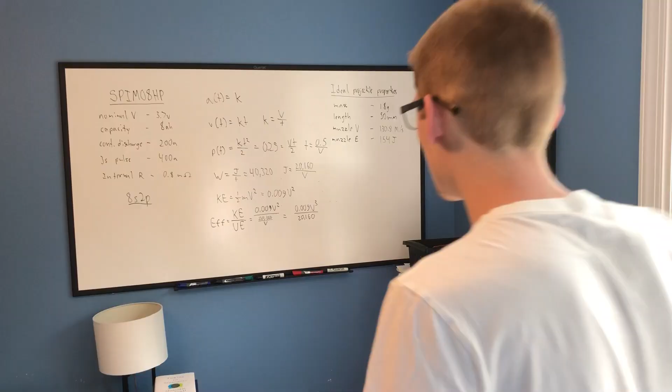I started out this week doing a lot of math to try and model the path of the projectile. I quickly realized though that I was being too optimistic with my calculations, that I would never really get to that point, or at least I wasn't willing to spend the money to be able to get to that point.

You may remember that a couple videos back, I explained my belief that capacitors were inherently inefficient in a coil gun system and could not allow for high efficiencies, and thus a direct drive system was the only way to achieve higher efficiencies. What I mean by that is that the coils would be directly connected to the battery. The battery would be directly powering them, and you don't have a secondary buffer like a capacitor bank that would be powering them indirectly. And in doing my calculations, I realized that the battery itself would be the primary bottleneck in a system like this.

In order to achieve muzzle energies of around 1,000 joules, which is a very respectable gun muzzle energy, with a reasonably short barrel length, you would have to have a battery that can output 3 to 6 millisecond pulses of around half a megawatt, 500,000 watts, which is a lot. I don't have the money for a half a megawatt battery, so instead of trying to get to that point, I went off of what I could get for a reasonable price, and again, as I stated in the previous video, went for efficiency and not power.

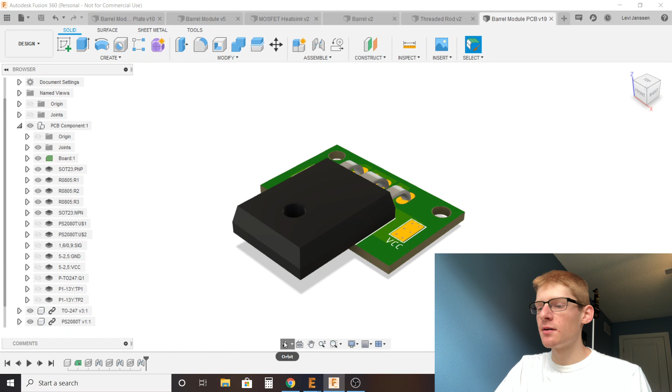Every barrel module has its own circuit board, and the primary component on that circuit board is this really big MOSFET. This MOSFET is the TO-247 package. The main reason I wanted to use that one is, well, of course it can do a lot of current, but more importantly, the leads are spaced out so I can get proper wire connections, proper traces in there.

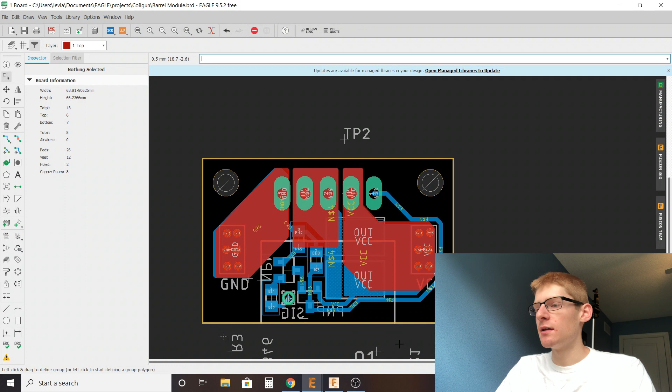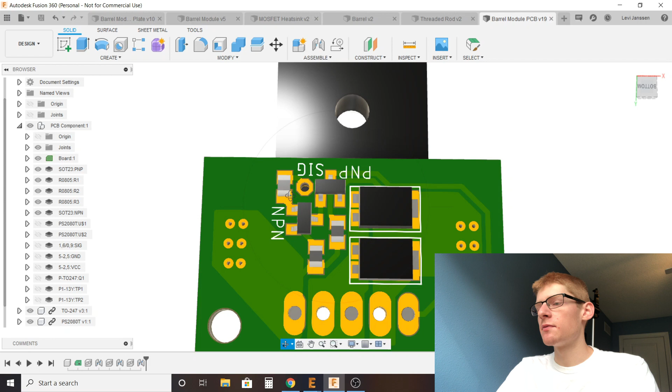And this circuit board was designed in Eagle. Eagle has a very handy feature where it automatically links to Fusion 360, so I'll just be showing it to you in Fusion. So of course this is the MOSFET on top, and then if I turn it over, you'll see some SMD components. Over here, there's a PNP, NPN transistor in the SOT23 package, and then a couple of 0805 10 kilo ohm resistors. These 5 components are what drive the MOSFET.

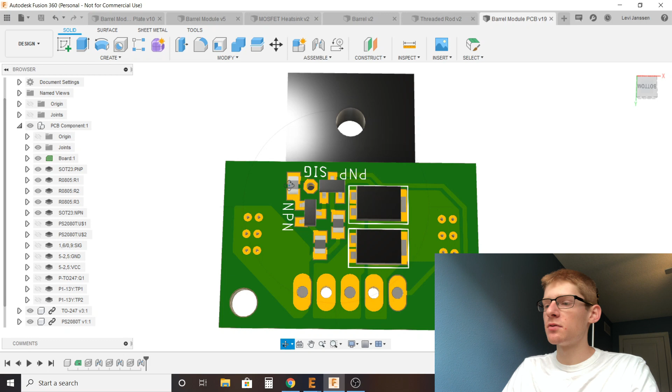They essentially take a very small current at a small voltage from your microcontroller, say an Arduino or something like that. At this hole right here, this is where a signal pin would be, but they take that small current at small voltage and then increase it to the full voltage at a higher current to fully turn on the MOSFET. So effectively what they're doing is they're giving the MOSFET logic level control.

So every circuit board, every barrel module has that logic level control built into it. So all I have to do is wire it up directly to my microcontroller and say turn on, and it'll turn on. Then over here, these big wide flat SMD components here, these are diodes. These 2 diodes are in parallel and they're running in the opposite direction of the current across the coil. So they are flyback diodes.

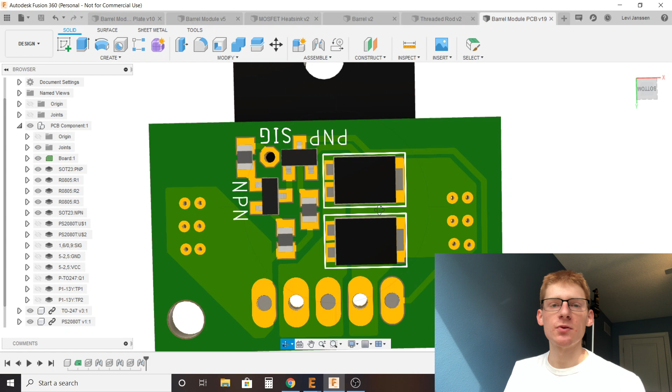So when the coil turns on, it pulls a projectile through, but then when it turns off, the opposite current is generated in the coil, which could potentially be damaging to the MOSFET or the battery or other components. So these flyback diodes allow that current to dissipate by being in the opposite direction. And each of these is rated for 250 amps over an 8.3 millisecond period.

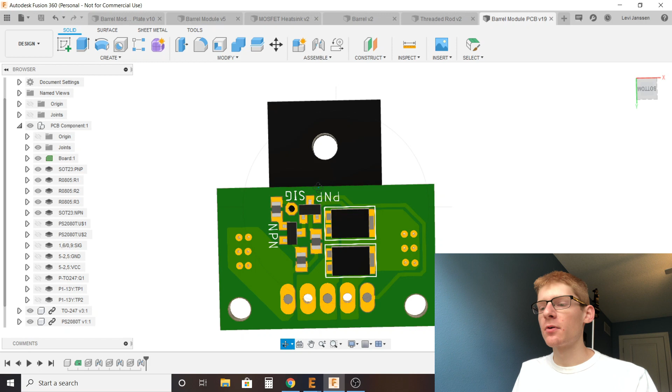Oh, I should also mention that each of the modules needs to be able to handle and conduct 300 amps. The idea is that there will be 4 of these modules on at the same time, so 1200 amps total. That's the maximum the battery should be able to output. So then each of the 4 only needs to be able to handle 300 amps, which is much more reasonable. Still a lot, but more reasonable.

I typically get my electronics from LCSC.com, which is a sister company to JLC PCB. And since they are a Chinese distributor, they do have a lot of Asian brands. So these 2 bigger components, the big MOSFET and the flyback diodes, they are both Chinese manufacturers, which makes me a little bit uncomfortable

just because I've had experiences in the past where the components were not rated for what they claim to be rated for, but LCSC is a reputable distributor, as far as I know at least, and they both have comprehensive data sheets that are in English that have everything that I would need. So they seem legit. I'm just going to assume that they're legit. I think anything that comes from LCSC is probably tested and ensured of quality.

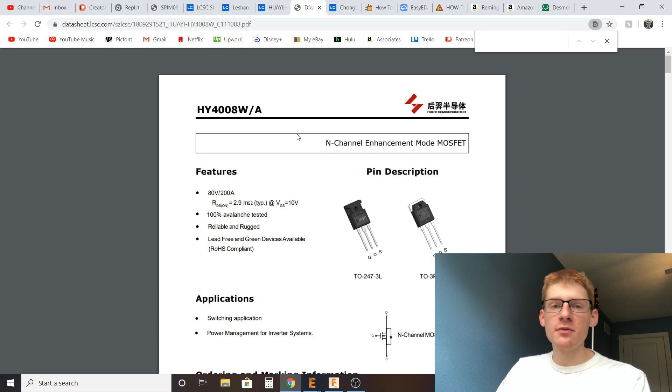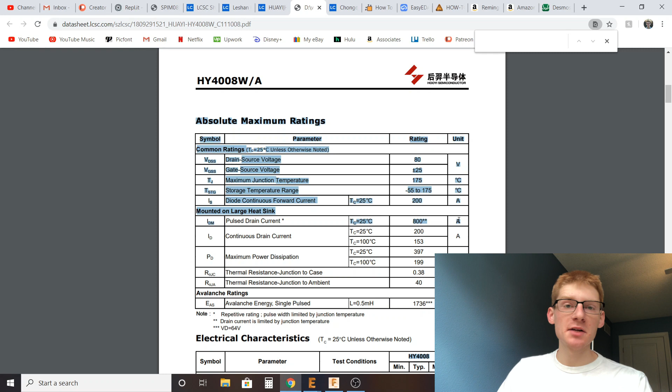And these components are rated for a lot more than I'm going to be pumping through them. These MOSFETs are rated for a pulse current of up to 800 amps. And again, I'm only doing 300 amps per module. So there's a lot of room to expand there. And then these guys are again rated for 250 amps, but I have 2 of them in parallel, so it's more like 500 amps.

And all of these components are also rated for up to 80 volts. And I'm only running 33.6, so I could double the battery voltage, thus quadrupling the wattage, and everything would still be able to handle it. On the component side, I'm definitely going a little bit safe.

If the MOSFET fails, MOSFETs typically fail on, which would mean that it would just be continually discharging the full current of the battery through it, which would probably blow up the battery, which is not something that I want to do. Back to the circuit board here.

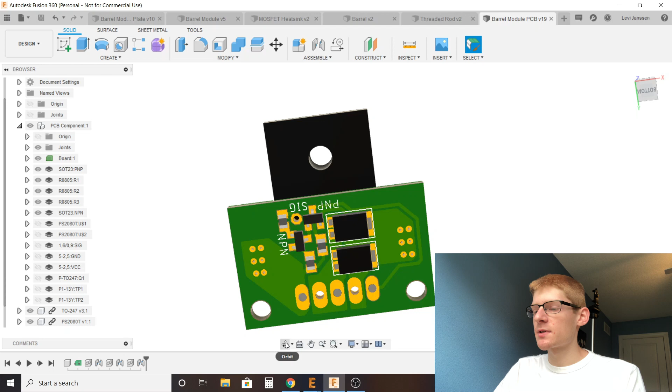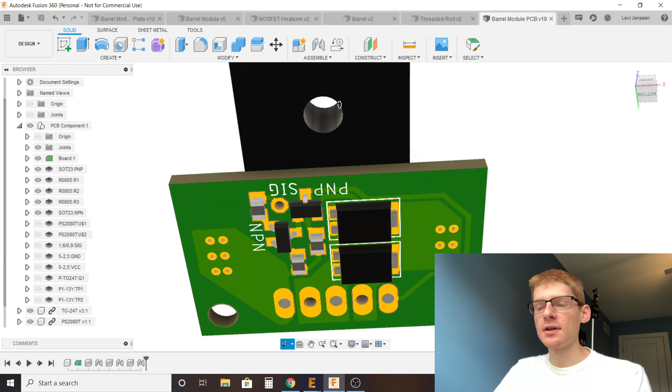So you've got your components on the bottom side and then the big MOSFET on top, and then you have some really big traces here, or at least as big of traces as I could make it. I made it so that the traces are on the top and bottom layers. So I'm effectively doubling the trace width by having it on top and bottom. The traces are still not as thick as I would like them to be, but I'm not too worried about it. The bottleneck, as far as current goes, is not in the PCB, I don't think.

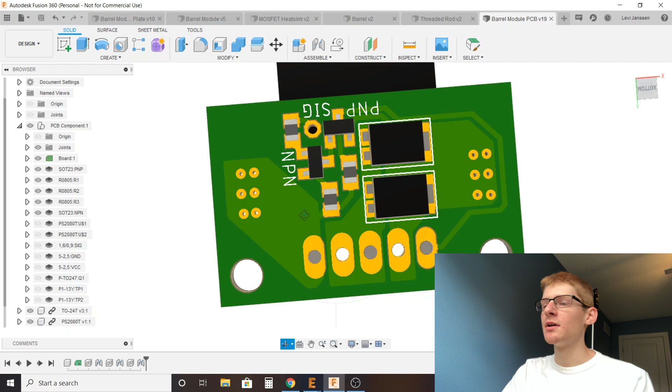I'll show you where I do think it is in a second. The other reason I'm comfortable with these PCB traces is that they're super flat. Pretty much the entirety of it is exposed to air, which means that it can dissipate that heat off quite a bit, and they're really just big heat sinks. And there's also going to be quite a bit of aluminum around here to soak up that thermal energy, so I don't think it's going to be too big of an issue.

I definitely don't think the circuit boards are going to explode. Other things are going to explode before that happens. So this is the circuit board. This is the first thing that I started designing, and that brings us to the actual barrel module design. This is the barrel module, or at least how it's looking so far. So right here is the PCB, as you saw, and then the whole thing is up against this plate.

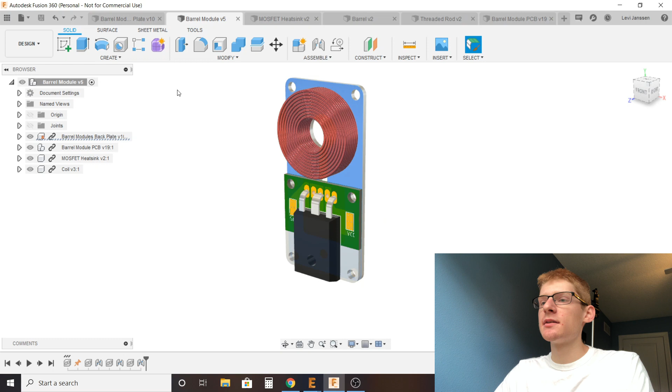This is the backing plate. This is what everything sits up against, and it's also what will be squishing all of the barrel modules together. This is a 1.6 millimeter aluminum plate, and it's kind of the foundation for the entire module. So this backing plate has two holes here and here that line up with the holes on the circuit board. So this is where the circuit board mounts. It'll just screw down to here.

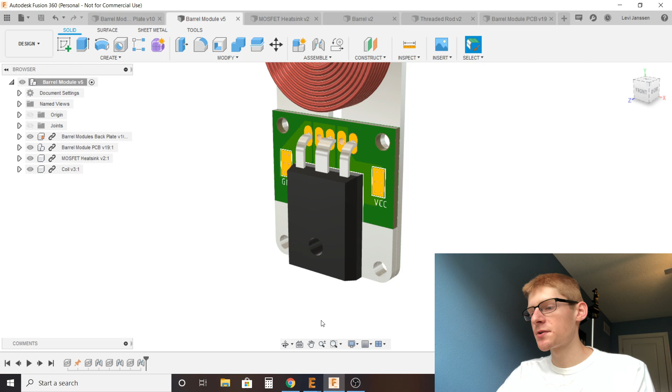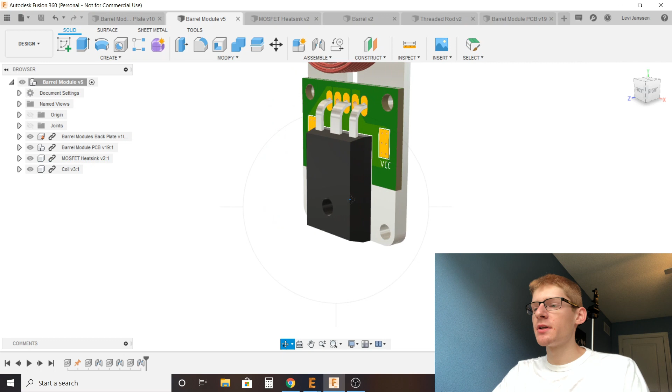Then you also notice that down here, the aluminum is a little bit thicker. I designed a little aluminum plate that will attach down here, and this is where the majority of the surface area of the MOSFET will be pressing up against. And then this plate also has holes in it for the mounting screws of the MOSFET to go through. So this is the primary heatsink. It's a good chunk. It's 3.2 millimeters thick of aluminum that should be a decent heatsink.

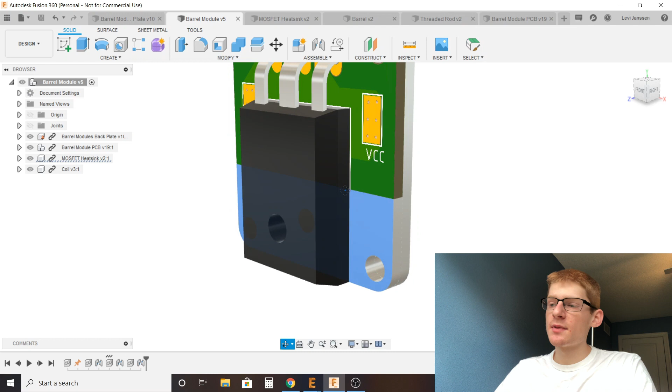Then this other plate is also 1.6 millimeters. The reason I made it 1.6 millimeters specifically is because that's how thick the circuit board is. The MOSFET is partially on top of the circuit board, and then this way everything will line up nicely. Everything will be flush with the 1.6 millimeter aluminum plate.

Then of course up here is the coil. There's nothing really attaching it. Not really gonna worry about that. Once you get multiple barrel modules, the coil should be squished into place, and it should be a pretty tight fit around the 10 millimeter carbon fiber tube that I'm gonna have as the actual barrel.

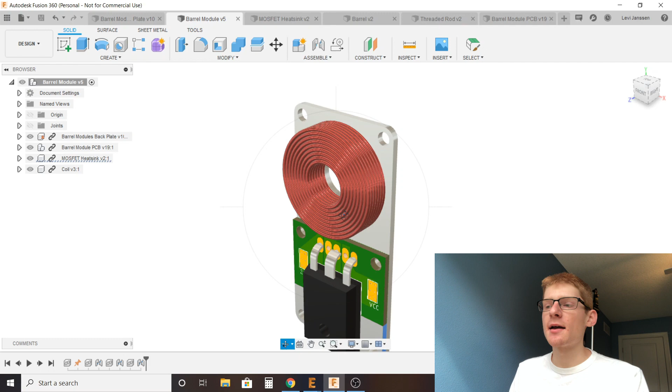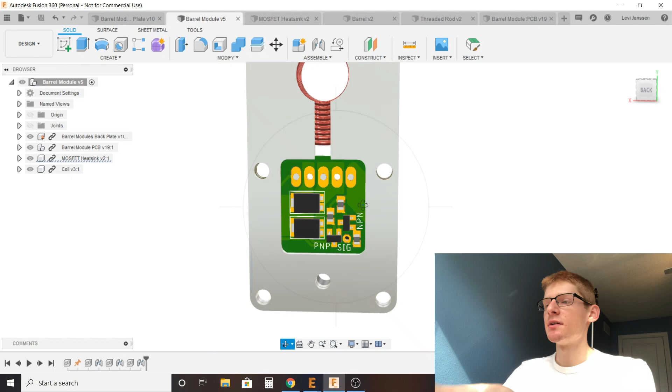Oh yeah, and I didn't show you the back of this. The back of this looks really cool. All of the SMD components here have a little cutout in the aluminum plate. That's where they go. So I was kind of constrained for space here because I knew they needed to fit in this little cutout. So all of your components are back here, and they're distanced from the aluminum so they don't short to it. But yeah, it all fits in there really nicely, and I'm very happy with how it looks.

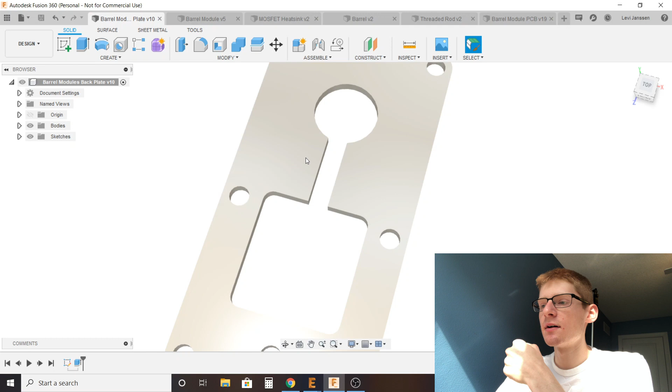You might have also noticed that the backing plate has this slit in here from the electronics hole to the barrel hole. That is for the leads, the wires of the coil. Once you have a bunch of these that are squished together, you won't have room to take the leads of the wires and just move them anywhere to stick them into the circuit board.

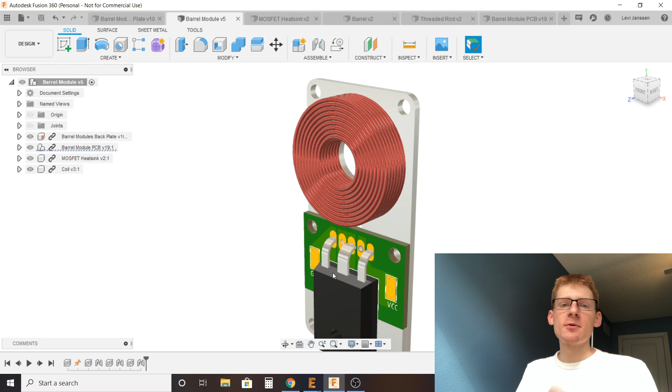By the way, these holes here, that one and that one, are where the leads of the coil go. But you can't just stick them anywhere willy-nilly because there won't be room for it, because everything's going to be really tight in here. So you'll have one lead that'll be coming out of here and then one out of the bottom here, because that's just where you start and stop winding the coil. So then they can both go down through this slit without taking up any room because they will be flush with the aluminum plate.

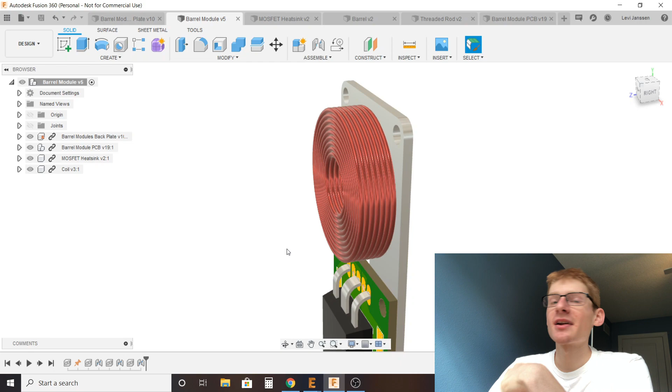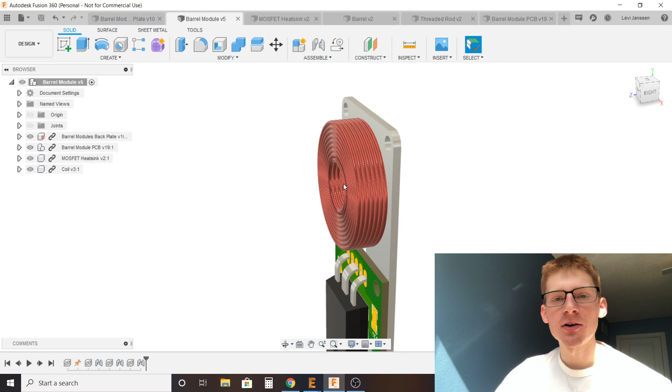But yeah, so that 96 milliohms is in order to get 300 amps per coil. And then I brought up the current bottleneck earlier. I think that's the coil, because these wires are 0.94 millimeters in diameter, and they're all bunched together. I think if anything is going to fail, it's going to be the enamel copper wire in the coil.

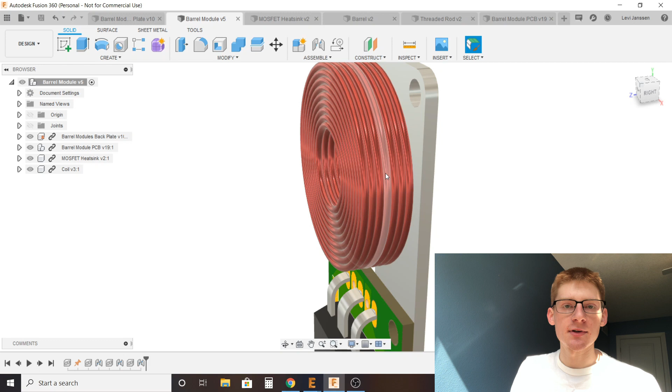And of all places for it to fail, I think it's a good place, because if the electronic components fail, they're probably going to fail on, and then we'll have an inrush current that'll just kill everything. But if this fails, it'll effectively be like a fuse. It'll break and then you'll have no more connection and then nothing will happen. So I think this is a good place to fail. I am okay with the coil breaking, but I would not be very encouraged if the MOSFET failed.

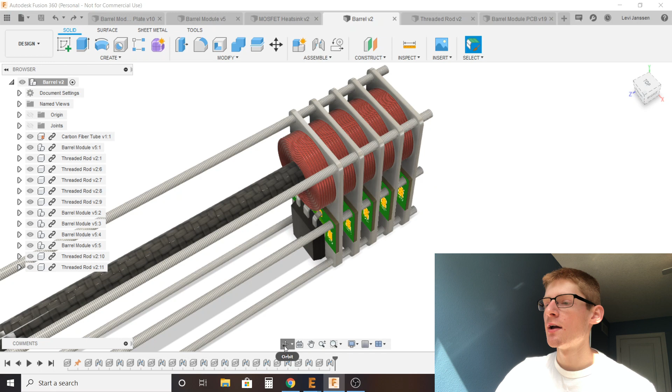So this is the barrel module. Now let's talk a little bit about how the barrel modules are actually all going to come together to make the actual barrel. So this is my design for the barrel so far. I have the 10 millimeter diameter carbon fiber tube at the center. By the way, that's 8 millimeters internal diameter. I intend for the projectile to be 7.5 millimeters in diameter and around 50 millimeters long, just a soft steel.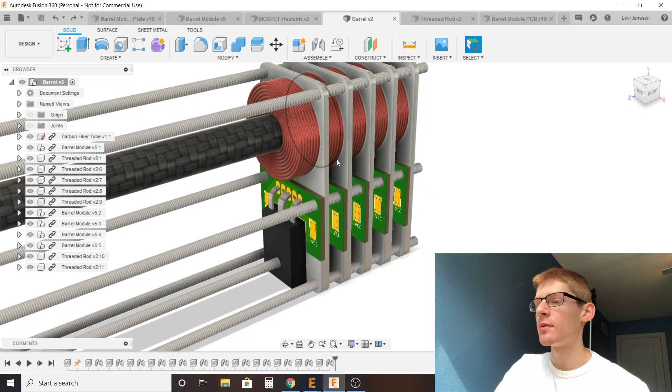But the backing plates for all these barrel modules have a lot of holes in them, and you want to stack them all butt to butt, face to face. So my thought for this is that you'll just have a bunch of threaded rod that you'll run some lock nuts down, and then use that to clamp everything together. I think it should work pretty well. I could make it stronger if it's not, but I think it'll at least work for preliminary tests.

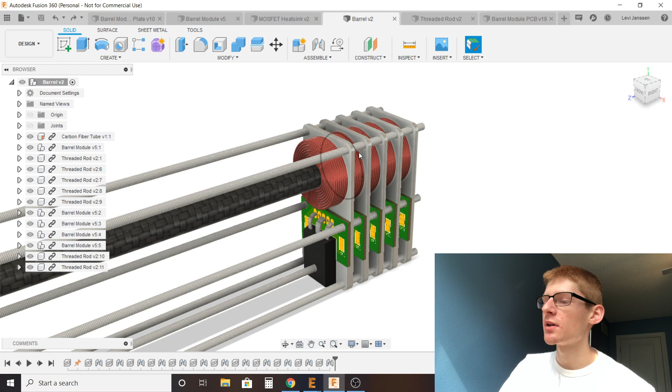So I currently have 7 threaded rods going through here, which is kind of overkill, but it's what I could do. It's kind of just the only thing I was able to do, because I needed some up here to clamp on the coil. I needed at least two to hold the circuit board in place. I needed one to go through all of the MOSFETs. Then I needed two in the corners to hold the bus bars.

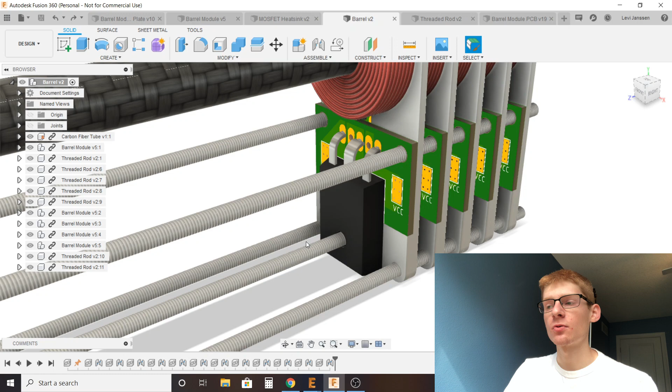I haven't modeled the bus bars yet, but what I'm thinking right now is that the bus bars will hang below it, and that they will be held in place by 3D printed brackets that will hang from these two threaded rods here. And then sticking on the topic of the bus bars, the power distribution, I didn't bring up these pads on the front of the circuit boards. That's the power distribution solution.

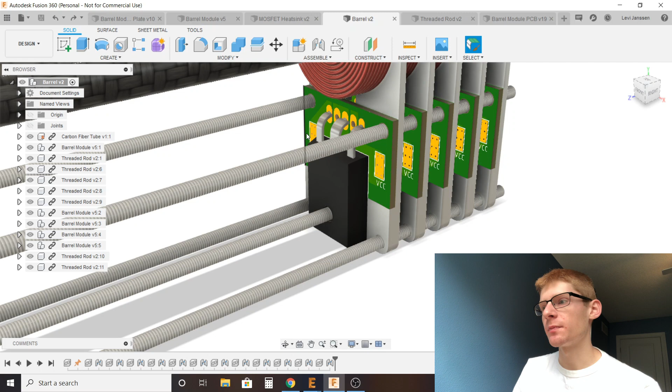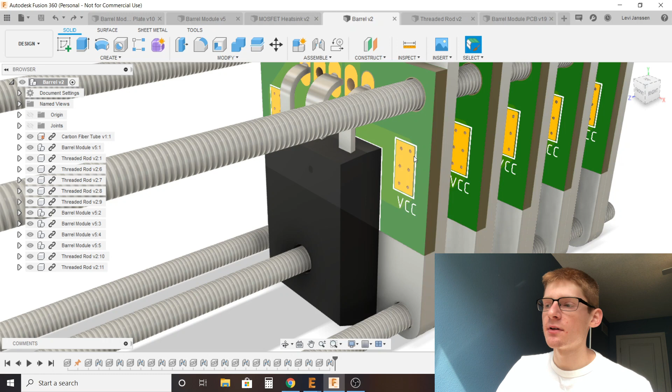So the bus bars will be on the bottom, and then I think I'll just have a bunch of short, maybe 14 gauge wires with wire lugs that'll screw into the bus bars, and then I will remove the insulation from the end of the wire, and I'm just going to solder them directly onto these pads, which seems kind of like a crude solution, but I think it'll work. I don't think it'll hurt me, especially since these pads have really big traces around them, so they're kind of like heat sinks. I think it should be fine. I don't think it's necessarily going to be a bottleneck, or at least not more of a bottleneck than the actual coil wire is.

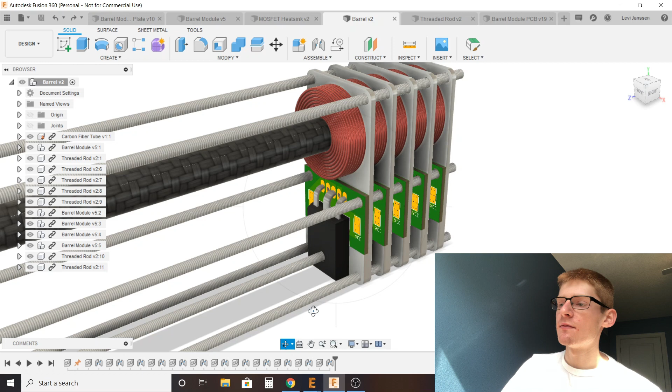So then the idea for keeping these all together is I'll put one on, and you fix it in place with some screws, and then you just slide the next one on, and you put some more screws on it, and then you really tighten them down to press them up against each other. The depth of each of these coils is just at 8.2 millimeters. They're 8.2 millimeters thick, and things line up pretty darn well here because the MOSFETs are end to end. They are being pressed up against.

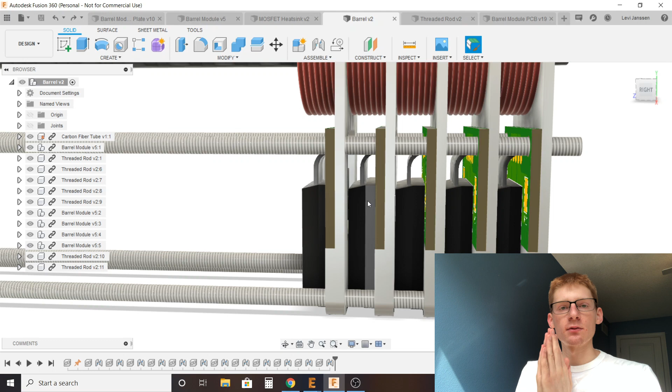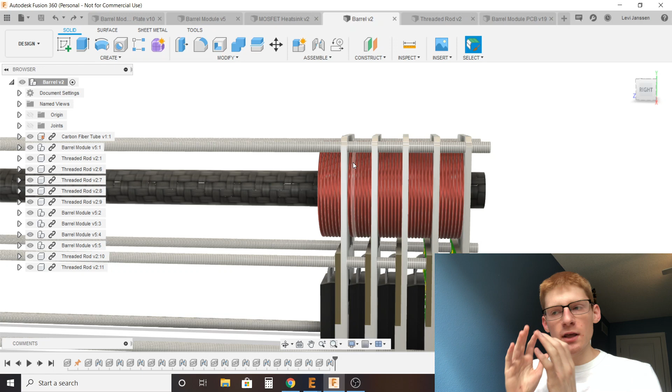So what this means is that the MOSFET, or at least the end of the MOSFET, has a chunk of aluminum being pressed up against its front and back, and really clamped on there. So I'm very happy with that. I think that should be a pretty good thermal transfer. And then the backing also happens to line up really nicely with the edge of the coil. So not only will it be clamping onto the MOSFETs, but it'll also be clamping onto the coil, keeping it in place, which is why I'm not too worried about fixing the coil to the backing plate, because it's going to be clamped on by the next backing plate. So yeah, that is the design for the barrel thus far.

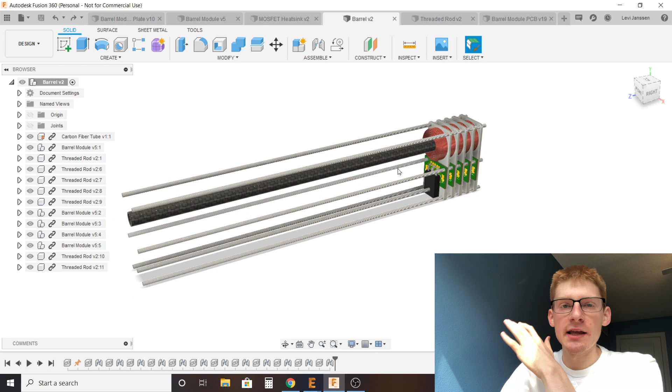Of course, I only have 5 modules here. I'm thinking it'll be 25 to 28 modules. This whole thing is 300 millimeters long, which is actually longer than I can get this threaded rod. This is M3 threaded rod, and I can really only get it at 250 millimeters, so I'll have to try and source some longer rods for that, but whatever.

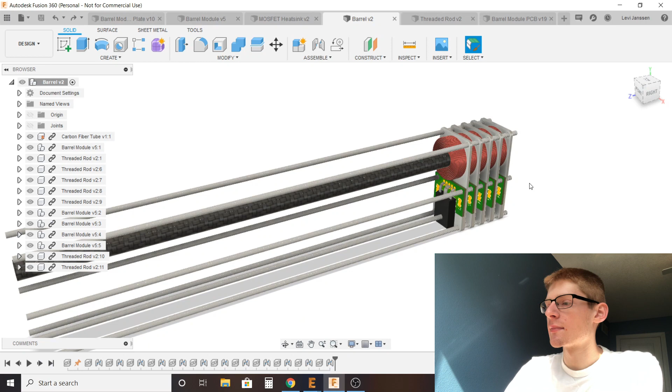So this is the barrel module design. I'm happy with it. It looks really nice, and it's very compact. I originally was thinking that the barrels would be 10 millimeters deep, but they're 8.2, so they're even less, which is spectacular. Which again is what I want. I want them to be as thin as possible.

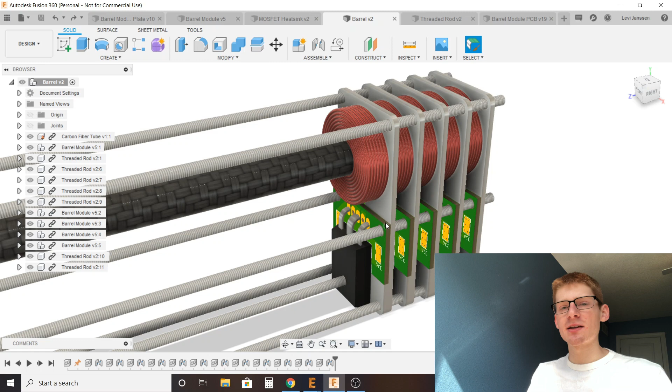I think this can handle the current, at least for the 1 millisecond that each module will have to endure it. The whole thing is like 3 to 6 milliseconds. Each one's only going to need 1 millisecond, maybe 2 milliseconds. So I'm not too worried about that. I'm still kind of worried about it. But anyways, there are a couple of unknowns with this design.

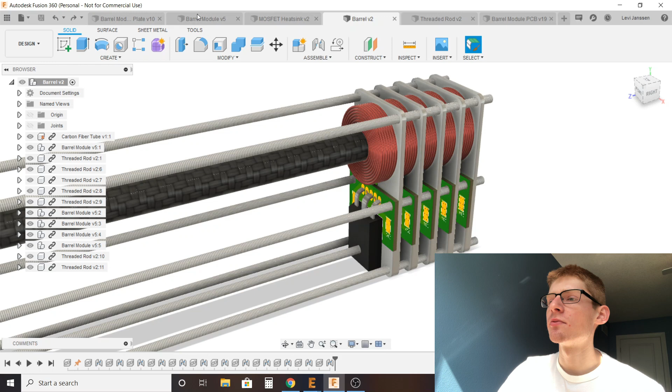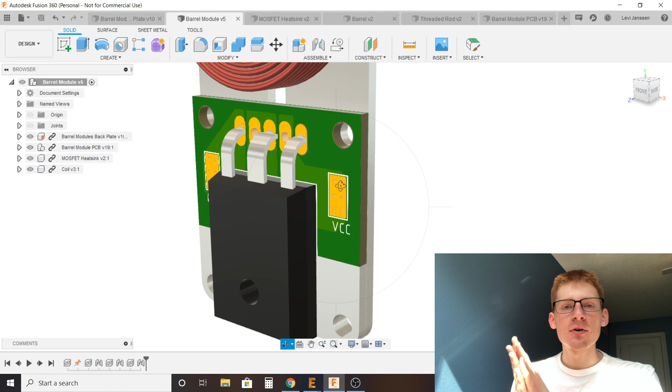The bus bars aren't really an unknown. I'm pretty confident I know what I'm going to do for that. But for the actual barrel module, there's 2 things that have to do with an electrical connection that I'm not sure about. These pads on the sides here, they both have 6 vias in them. So that's little holes in the circuit boards that go all the way through, which means that there could be an electrical connection on the bottom of the circuit board, which is being pressed up against the aluminum frame. So I don't know if those are actually going to make sufficient electrical connection.

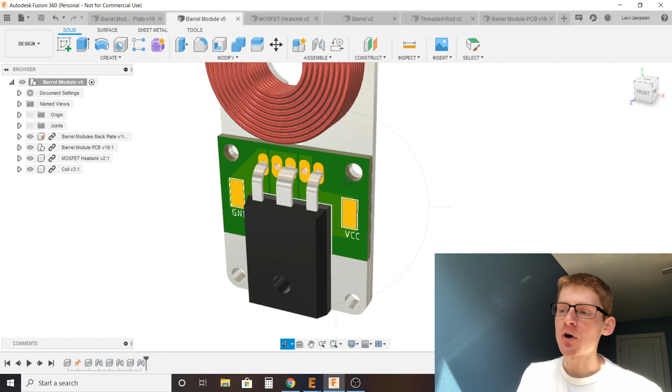If they do, I'm going to have some thin barrier in between the circuit board and the aluminum backing plate. Otherwise, you're going to be shorting your ground and your source voltage, which is not a good thing. But if it is a problem at all, I think it could just be like a sheet of paper. Hopefully, it doesn't have to be too much more than that. I don't think it should be too much of an issue.

The other thing, which could be a little bit more interesting, is that the back of this MOSFET is an exposed metal heatsink. And oftentimes with these big MOSFETs, the heatsink is connected to the gate of the MOSFET. So if you just clamp it directly to a heatsink like this, if you were to run current to the heatsink, the MOSFET would turn on, or at least it would try to turn on. What that also means is that if all of these heat sinks were connected, which they probably would be, if you turn on one of the MOSFETs, then all of them would turn on.

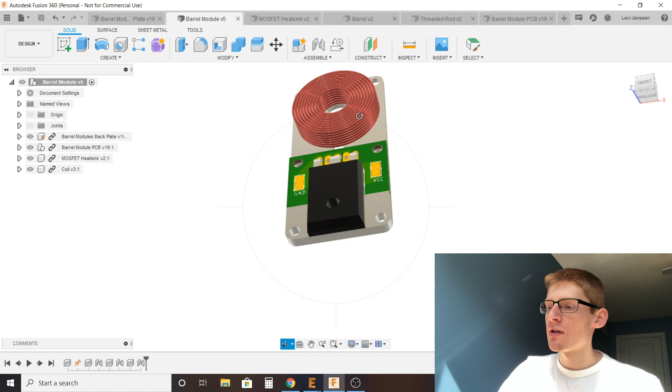But I don't know if that heatsink is actually electrically connected to any of the pins. The datasheet does not explicitly say that it is, so I don't know if it is or not. I'll have to test that once I actually get the components. There's not really any way for me to know now, but if it is, then I'm probably going to have to add in some padding below here. I can get these small 0.3 millimeter silicone pads, which would go in between there. Those silicone pads have high thermal conductivity, but of course extremely low electrical conductivity. So they would separate it electrically, but still couple it thermally.

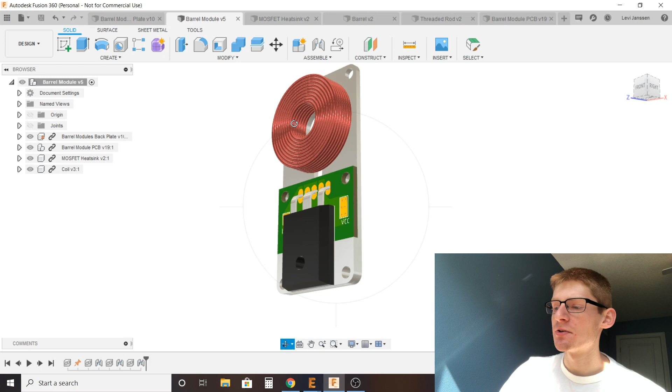So if I did have to do that, I would be increasing the thickness of this whole barrel by 0.3 millimeters, which is not a big issue. It would come up to 8.5 millimeters. It would allow for a little more wiggle room for the coil, which is not ideal, but it is what it is. If I have to do it, I have to do it.

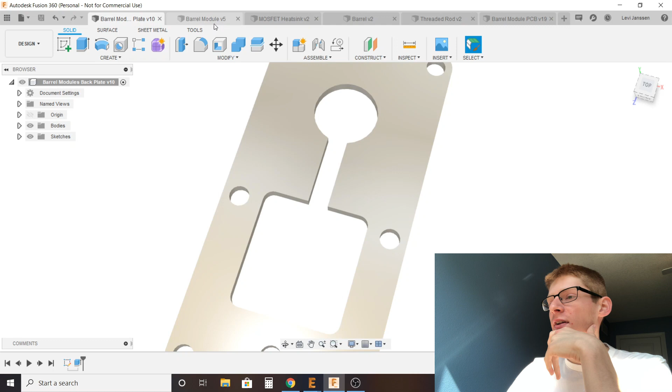But yeah, this is what I've been spending the last week trying to figure out, and I'm happy with it. It looks good, and I feel like I've gone through every failure method, and if it does fail, I will know where to look. And I mean, just look at it. The thing looks really cool. It looks like some mad scientist experiment, something. I don't know. I'm happy with it.

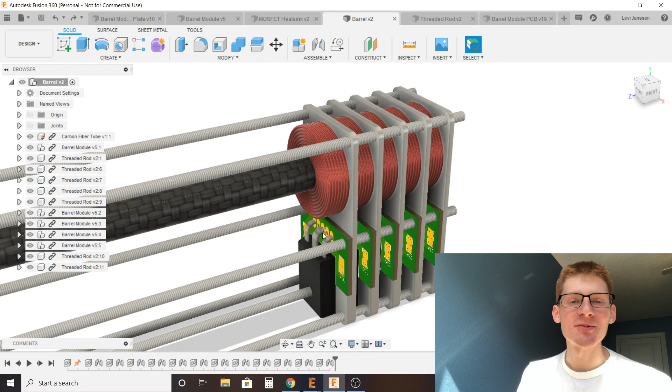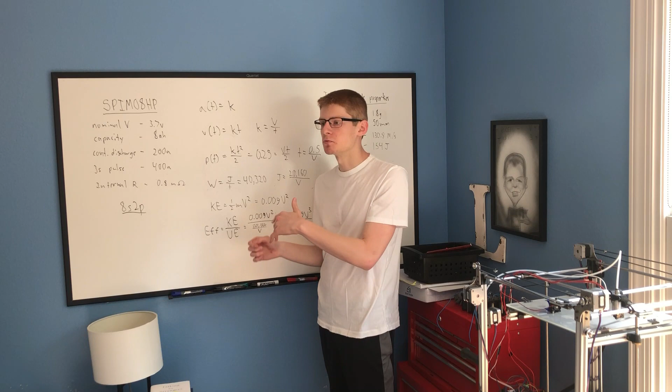And about that math that I started out doing, the first step in this process, it wasn't entirely useless. It was actually pretty interesting. So I just did some very simple calculus, assuming that the projectile would accelerate constantly throughout the barrel, which again is my goal for this project.

So then with that simple calculus, in addition to the kinetic energy equation and the equation for wattage, I was able to calculate, or at least make a simplified equation that would calculate the amount of energy I use based off of the input velocity, based off of like an x value velocity. And this equation already takes into account the 40 kilowatts that I'm inputting and the 250 millimeter barrel length or acceleration length.

I was then able to simplify the kinetic energy equation by just inputting the math and then divide them, the kinetic energy over the used energy, to calculate my efficiency. And I came up with this equation, 0.009 V³ / 20,160. So if you model that on a graph, well, it's an x cubed graph, so it starts out low and then flattens out at 0 and then keeps on going really high. And I'll put a picture of that graph on the screen here.

So on this graph, the x input is velocity, that's the velocity of the projectile, and the y value is the efficiency. So I have a horizontal line at 1, which is 100% efficient. Anything beyond that point where these two graphs meet, beyond the 100% efficient, is just not realistic. Of course, you can't go beyond 100% efficiency. Anything beyond that would actually reduce the efficiency because you can't accelerate the projectile that quickly.

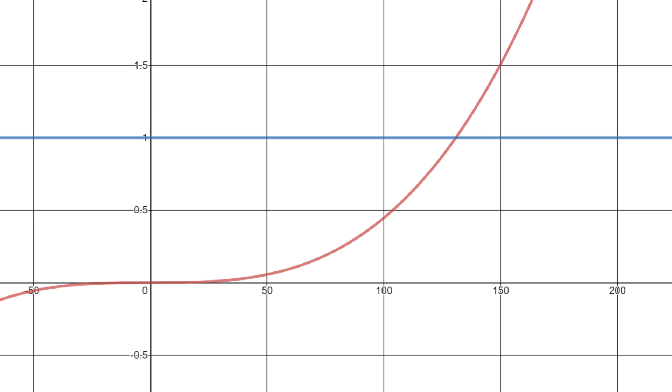But what this tells me is that, first of all, the whole thing is positive, which means that the faster I go until I reach that point, the more efficient it gets, which is good. This also tells me at what point exactly the system is most efficient. So where this graph reaches 1, where it reaches 100% efficient, is at around 130.8 meters per second velocity.

What this means is that given these parameters, given the battery wattage and the length of the coil and everything else, if I were to get the projectile up to 130.8 meters per second, the system would be 100% efficient, which is of course unreasonable, but at least I have a frame of reference. That's my goal. That's where I'm trying to get to. That's where I'm trying to approach.

So what that means for my ideal projectile properties, my mass that I'm going for is 18 grams. That's pretty arbitrary. That's just based off of the size of the projectile and the density of steel. That doesn't really matter necessarily. Then the length is 50 millimeters, as I said earlier. So the ideal muzzle velocity at 100% efficiency is 130.8 meters per second.

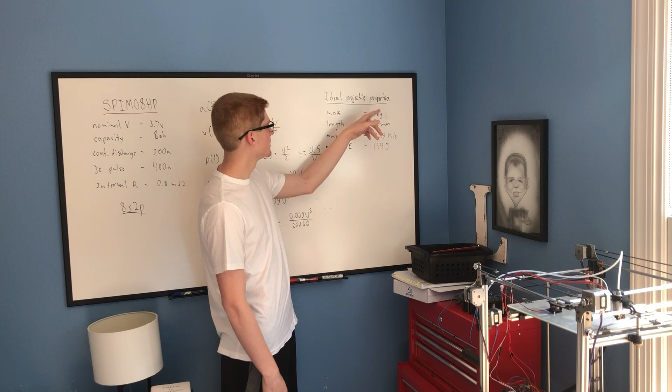And then plugging the muzzle velocity and the mass into the kinetic energy equation, you get 154 joules. So if this system reached 100% efficiency, I would get 154 joules of kinetic energy out of it. So I know what my goal is. I know what I'm aiming for.

So there you have it. That is my progress on the coil gun project. It's been a week of heavy thinking, and honestly there's not a ton to show for it, but I'm very happy with what I've been able to produce. It looks good. I think it might just work, which is crazy.